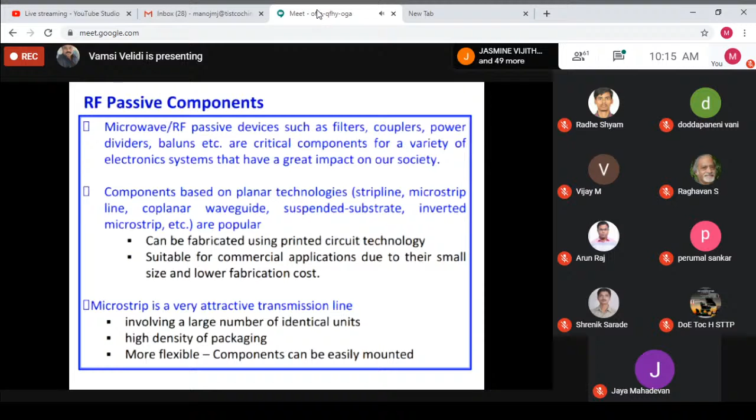But whatever transmission line theory we discuss, these can be readily converted into planar technology. And obviously we know the advantage of microstrip among all planar components. Microstrip is bit easier with high density packing, and we can include other chip components also. So the integration point of microstrip is relatively better than stripline, suspended stripline, and other technologies.

Coming to the filter, these are the most important components for any communication system, as a communication system consists of transmitter, receiver, and antenna. So almost all systems are used with the filter. I can say the filter is a discriminating component for a dense, high frequency electromagnetic spectrum, because the whole spectrum is fully used for different applications in different bands. So how to separate out the band so that a particular transmitter will receive only a particular frequency. So the filters are indispensable components, I can say.

Coming to particular transmitter and receiver, if it is a receiver, there are several places where filters are crucial. The first and foremost, right after the antenna, is the filter. Because though the antenna receives a particular narrow band signal, there is a lot of out-of-band noise also included in that. So the filter should suppress all the noise and pass only a particular frequency. This is called pre-selection in the receiver. This filter should be low loss with high rejection in the outer band, and should be narrow band as per the requirement of the receiver. This is a challenge for the designer, because high rejection and low loss together is a bit of a challenge.

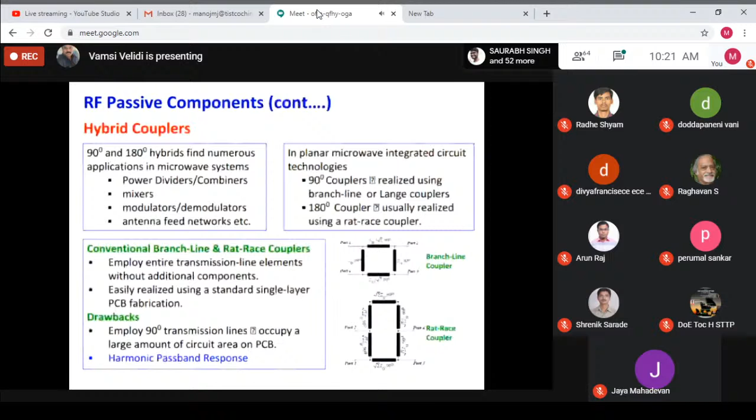A balun is also a component where differential components are much used, requiring 0 and 180 degree phase. For antenna applications like dipole and others, this balun is the first component. So to miniaturize artifacts and suppress harmonics, this balun can also be constructed using filtering concepts.

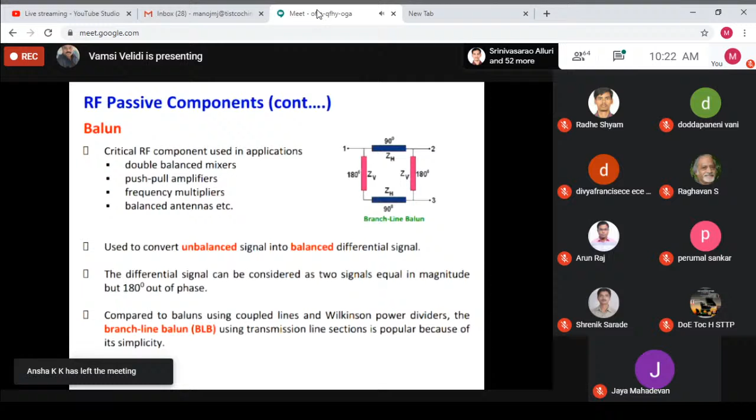So for design objectives, I'll explain the filters compared to the ideal response, conventional response, and the present performance response. If you get a clear understanding about these responses, then we'll concentrate on how to generate these responses using various methods. The first one is the band stop filter.

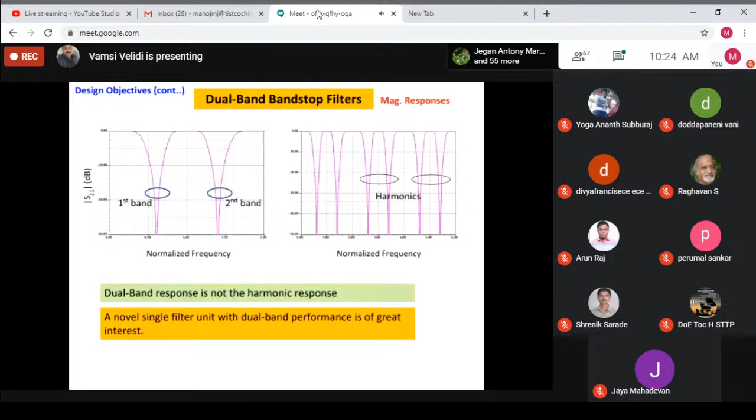And the low pass filter - in conventional methods we see a gradual roll-off from the pass band to stop band, and the stop band bit also extends somewhat. Now the present design goal is to increase the selectivity while being able to suppress as much as possible in the stop band. Up to now, present day research has achieved filters up to 10 times the cutoff frequency.

That is the low pass filter, available up to 10 times the cutoff frequency. So a band stop filter with a wide stop band can also be thought of as a low pass filter.

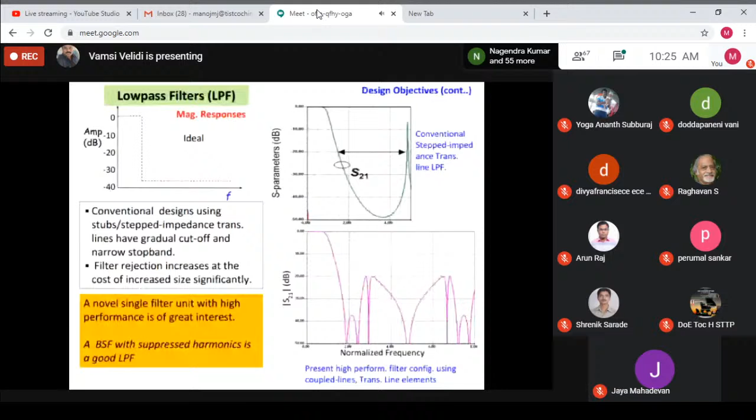Now coming to the band pass... Sorry to interrupt you, sir, the voice is breaking, not going smooth, it's breaking in between. Okay. Sir, it is a nice lecture. Okay, madam, maybe everybody is having some issue sometime. Please check.

Actually this might be because of some connectivity issues in the signal. Sometimes it is good at some points. Sir, will you please shift to the computer or laptop? Sorry to say, sir, I don't have a laptop right now, I'm in office actually. Okay sir, thank you. Actually this is the only way, sorry for everybody.

I think it gets clear after some time. Sir, now it is very clear, hello, can you try talking like this? Now it is very clear. But madam, after some time... Hello, okay madam, I'll be in this position now. Okay sir, hello, yes sir, I'm able to hear you, shall I proceed madam? Yes please proceed sir.

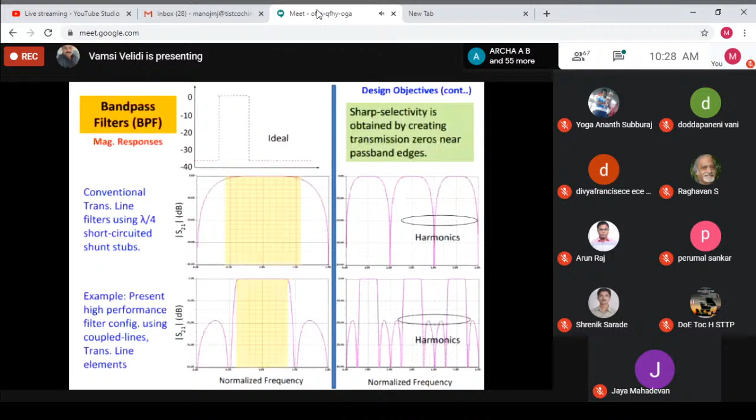Similarly, dual band pass filters have two pass bands. These are presently of great use for mobile bands like GSM - take for example 0.9 GHz and 1.8 GHz. Here, instead of using two filters for the two frequencies, a single filter working in both bands simultaneously is very important. So how to design these filters and what methods achieve this type of response - we are going to show.

These are important, sir. Yes ma'am. Mahadevan is telling ma'am it might be better if you could log off and log in again, it might improve the voice clarity. Sure ma'am, I'll do that. Okay, we'll wait sir. Sorry for that, no problem sir, fine fine.

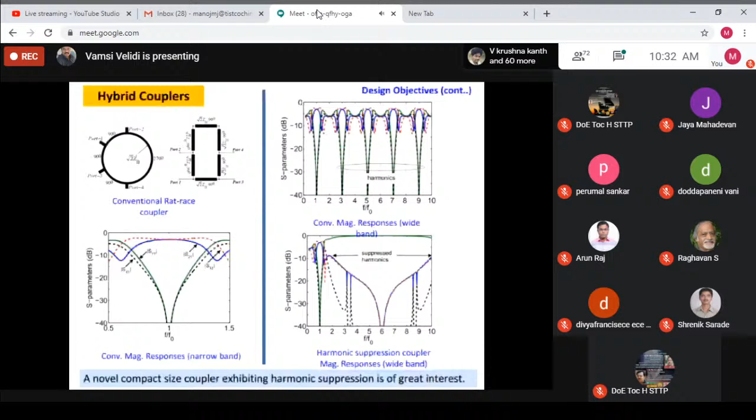Now the workflow for this component design, in advance, I am showing. So whatever may be the passive component specification you get, take the problem statement.

According to that, the main motivation, where we get more information, is the literature survey only. So we'll have a good literature survey, so that we can understand what methods can be easily applied, and select one. Then theoretical analysis - suppose any transmission line based model is taken, we can have the theoretical analysis.

Now for that we need to perform a simulation. If we have our own theoretical analysis for the S parameters, we can just write that small expression in MATLAB and get our own response. Or there are some commercially available EM simulators where the circuit simulation part is given, like Ansoft Designer or ADS. We can take ideal circuit components, transmission line elements, and simulate. So we can compare these, whether this is meeting our specifications or not.

Next, once a particular technology is selected, suppose microstrip, then convert all the parameters in terms of physical dimensions and construct the geometry. Then we need an EM simulator here - we'll implement the whole structure for the electromagnetic effect, to see the full wave analysis. So we can use any commercially available EM simulator.

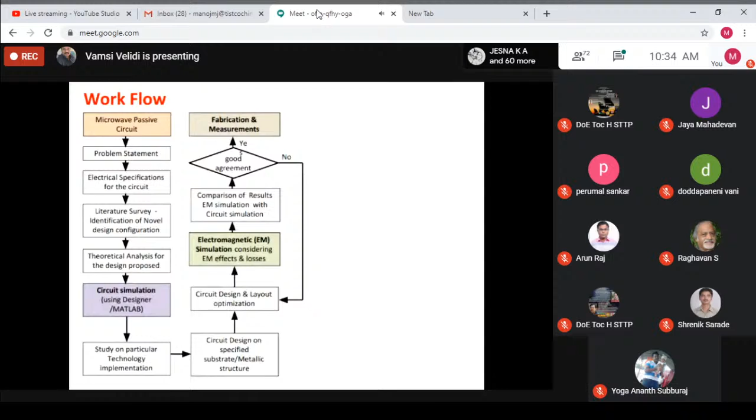Now let us start the transmission line theory based filters, which are the building blocks for constructing any filter, like band pass filter, band stop filter, low pass filter.

Let me give one slide presentation for the general theory of filter design. This is based on several textbook methods like image parameter method, constant-k, m-derived, composite filter, Butterworth, Chebyshev. The first basic procedure is to get a low pass prototype. There are some tables given for the ripple, rejection, bandwidth, everything, so we'll select the component values for the low pass prototype. After that, there are conversion methods that transform this into the required band pass or band stop filters. This is the traditional way of doing filters.

But now there are other methods also - this is just the introduction. Now we'll see the transmission line based design. For that, a small understanding about transmission line terminology is very much essential. I'm not covering everything here, just what are the major ones required specific to filter design.

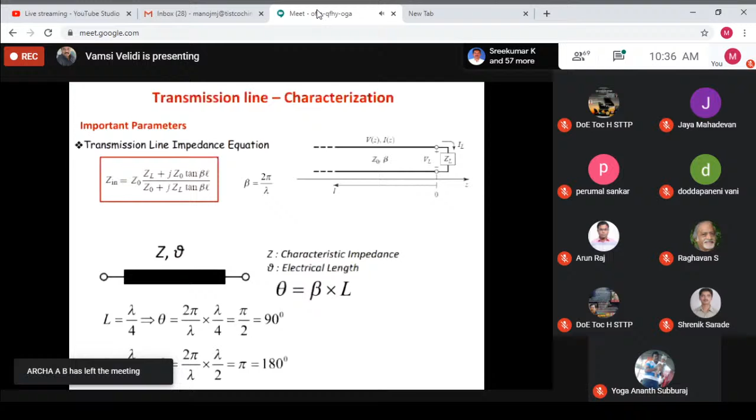Now I'll highlight those. For any transmission line, we'll have two parameters to define: impedance and its electrical length. There is a relation between electrical length and physical length in terms of the propagation constant - suppose we're talking in terms of lambda, the length is lambda by 2 or lambda by 4, we'll have a conversion here. If it's a quarter wavelength line, the corresponding electrical length becomes 90 degrees - a lambda by 4 line means 90 degree electrical length. Similarly, half wavelength means 180 degrees. And the input impedance expression for any transmission line having a load is shown at the top.

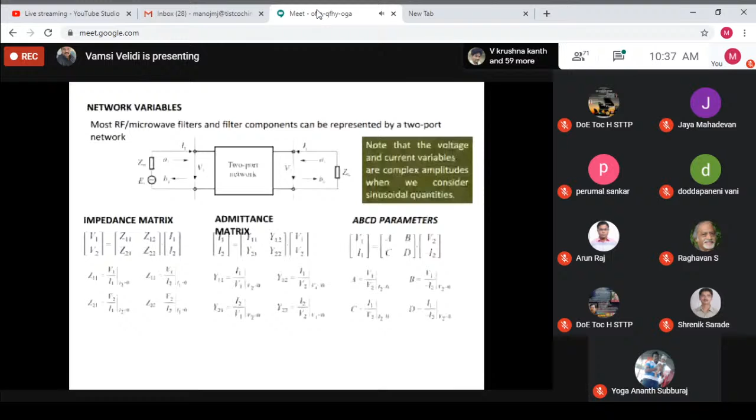Now there are some more prerequisites for understanding - the two-port network concept. This you can get from any Pozar or other textbook. There are some parameters to represent the network, or to derive the final parameters we're interested in, like S parameters. We'll have impedance parameters, admittance parameters, ABCD parameters, and finally the S parameters. We'll have this basic understanding from any graduation course, so take it for granted. Moving ahead - these are the S parameters, and the terminology is insertion loss, return loss for the filter, or if it's an antenna, its return loss.

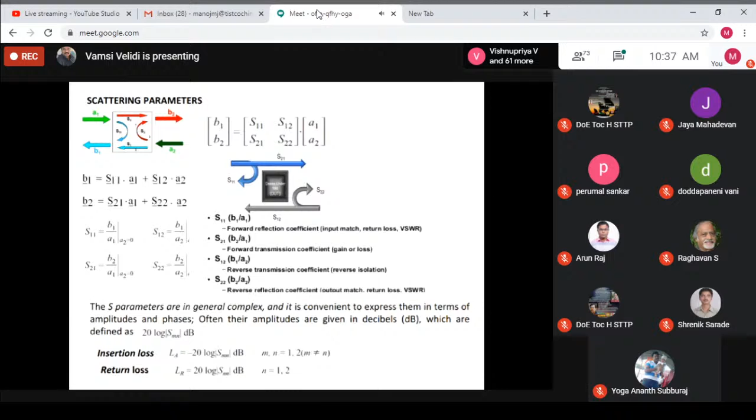After that, ABCD parameters for some cases are ready-made available in the textbook. Suppose if it is a series element, what are the ABCD parameters? If it is a shunt element, if it is a simple transmission line, the third one shown is the transmission line I showed before. These ABCD parameters are derived, and if any two-port network can be represented with pi configuration or T configuration, these will be helpful in your derivation. For that, I am showing what is available in Pozar.

After that, in the derivation process, you may also require some conversion from ABCD parameters to S parameters. Suppose in a circuit topology, if it is easy to use Y parameters, if two circuits are in parallel, you can get the overall Y parameters by adding the individual Y parameters. Once you get the overall Y parameters, you have to convert them finally into S parameters. Ultimately, the goal is to derive S parameters, which are easy to analyze and easy to measure using any vector network analyzer. For that, these are the conversion formulas available in Pozar.

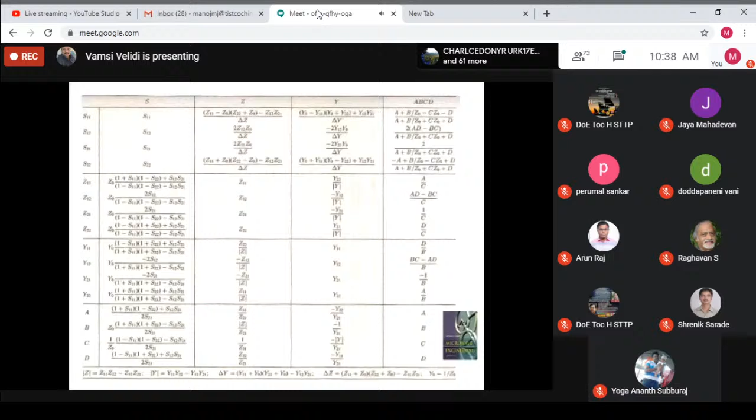Now coming to the basic transmission line elements. Here I have shown most of the popular elements. These are enough to construct any variety of filter. The first one is a simple transmission line with Z and theta. It is a normal transmission line.

Now coming vertically, I have shown the open-ended stub unit. That means the transmission line is connected such that the other end is simply left open. And if it is short circuited, and if two units are cascaded in double, triple, or four sections, that is called stepped impedance. Instead of a single impedance, we use two impedances with two different electrical lengths, or we can use the same electrical length.

There is another class of transmission lines called coupled lines, where two lines are closely spaced. This coupled line is one of the crucial elements in band pass filter design, and similarly in band stop, so that we can easily get the band pass response. There is a variety of coupled line configurations, like other two ends short circuited, one open, one short. There are 8 varieties also given in Pozar for reference. These will be used as construction elements for the filter. The combination of these designs will give very interesting filter characteristics.

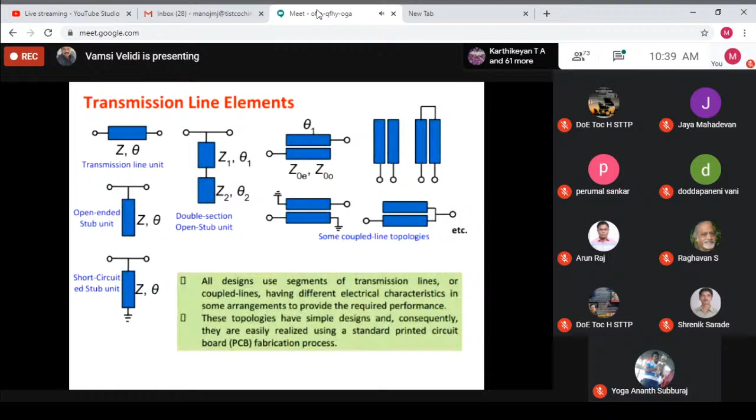Now, to understand the behavior of each and every element, I have shown some examples here. Starting from the first simple transmission line, no need to explain, it is an all-pass response. In terms of a filter, it will pass everything. So instead of that, I am starting with the open-ended line response.

Now, if you derive its input impedance, taking the input impedance expression for an open-ended line, since the load impedance ZL is equal to infinite, if you substitute that in the equation, we get Zin equal to minus j Z-not cot(beta L). Now, to get the S parameters directly, first we need to get the ABCD parameters for this. So I'm going back to the slide.

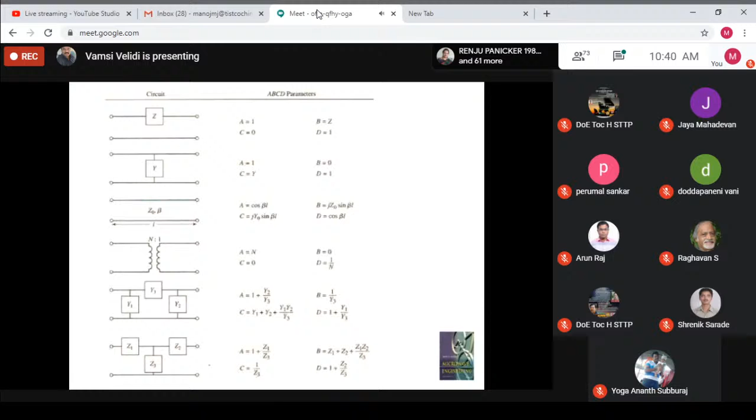Now here we can select the second one, because it is a shunt element. Why is it shown? Because the ABCD parameters are 1, 0, Y, 1. So in place of Y, we need to substitute this Zin, that means 1 by Zin becomes Y. If you substitute that in the ABCD parameters, then using the conversion formulas, you can write your code for S parameters. Now I am plotting the S21 response. This is how to generate our S parameters.

Once the S parameter response is shown, we can start understanding the behavior of the open circuited stub. Since if it is quarter wavelength, if you substitute beta L as pi by 2, 90 degrees as shown previously, then you will have a fundamental resonance at the operating frequency. The horizontal scale I have taken as 1 gigahertz, it can be normalized to any frequency. Now, if we see the behavior, since the electrical length is fixed, the operating frequency is fixed, but the bandwidth varies with the impedance. So if you see the profile, as the impedance decreases, that means if you convert into microstrip formula, as the impedance decreases, the line width increases in microstrip.

That way, I'm correlating here itself. So at the larger line width, it is more capacitive in nature, so finally its bandwidth gets increased.

Now, what happens if it is a half wavelength line? If you substitute beta L as 180 degrees, we are seeing two stop bands with respect to the center frequency, like 1 gigahertz. Whatever I am saying as electrical length, all are at 1 gigahertz only. That is our reference frequency.

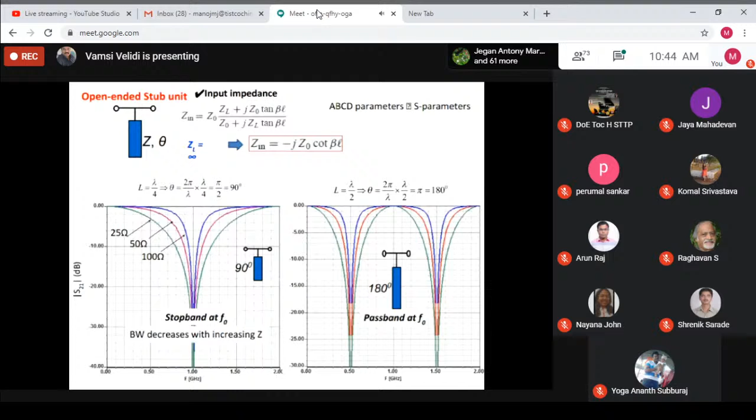Whereas if you split it into two with different impedances, so that theta 1 and theta 2 are shown here, if we derive the expression, we will get the Zin impedance like this. Then if you see the behavior, depending on the impedance selection for Z1 and Z2, we are getting controllability of the stop band compared to the single uniform impedance line.

So the observation is, if the impedance ratio is small, we are getting two stop bands, shown as the brown color graphs. Those are moving away from 1 gigahertz, which we always take as the reference. And if the impedance ratio Z2 by Z1 is higher, then we are getting the two stop bands like the black color one, and those are coming closer. If it is 3, 4, like that, it will come close to 1 gigahertz.

So like that, we can make use of this advantage of splitting the impedances into two. These will be used in band pass filter response with wider stop band, wider pass band, or dual band stops with controllable bandwidth, just by controlling the impedances.

So here, the basic understanding is, it is not a parametric based method. Suppose you take any other structure and just vary the width and length, seeing what happens - it is not like that. It is not random; everything is predicted here. We can have our predicted response, so that comfortably, wherever we want to exactly locate the stop band or pass band bandwidth, we can select based on the impedance selection simply.

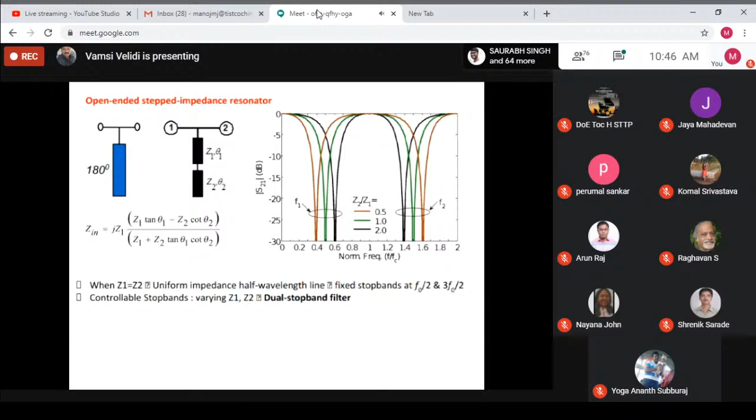And now this is the response for a coupled line. One example is shown. A coupled line, basically with two open ends, will give a pass band response. And depending on the ratio, because a coupled line can be defined using two impedances, called even mode impedance and odd mode impedance, whereas for a simple transmission line it is just a simple impedance. And here also, like electrical length, we should have even mode electrical length and odd mode electrical length.

We'll assume the phase velocities are equal in the two lines, so that we can assume the even mode and odd mode electrical length as the same single theta.

So for a quarter wavelength, this type of open-ended coupled line will give a pass band response. And as the impedance ratio increases, like ZOE to ZOO, that even mode odd mode impedance ratio, the pass band width increases. Accordingly, return loss also will show some variation.

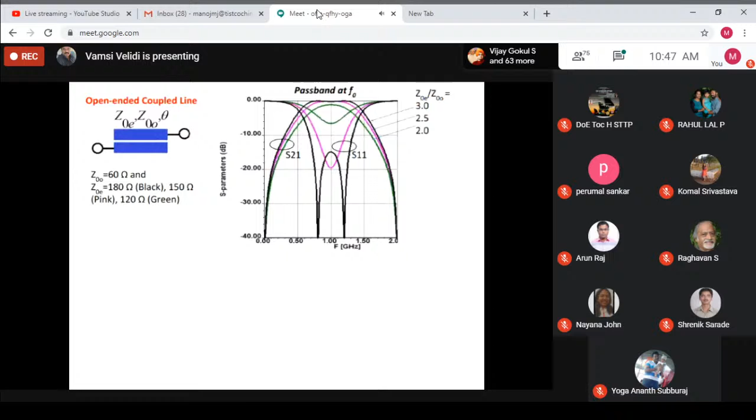In the Matthaei textbook, there are all variety of coupled lines and their ABCD parameters and Y parameters are nicely given, so anybody can take from there and start using them in derivation.

Now, using these elements, let us start with a band stop or low pass filter as an example. As I have shown, a single quarter wavelength open stub gives a stop band response. Now I'm comparing both the stepped impedance response to show the advantage.

The bottom figure shows the stepped impedance line response in black color. Based on the impedance ratio, if Z1 is equal to Z2, fixed responses at 0.5, 1.5, and greater or less than these, are shown.

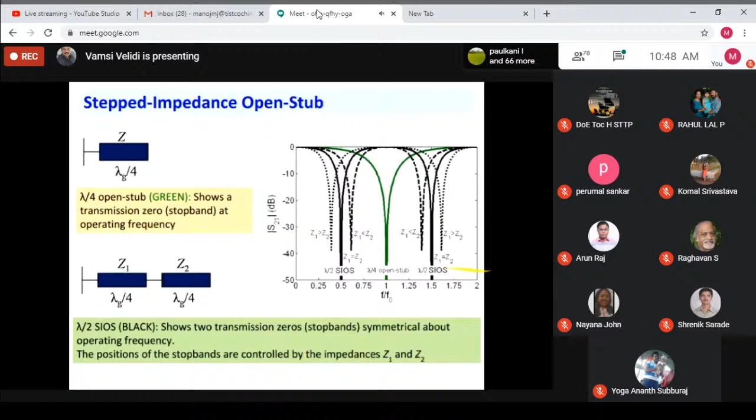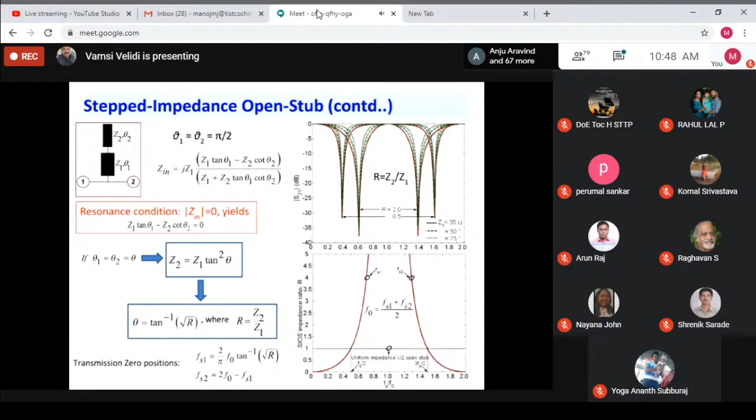Now let us use this in a dual band stop response. This is a simple behavior. To get the transmission zero position, we should make Zin equal to 0, then we'll get a condition in terms of theta. The position variation is shown here.

Now I'll show the design of the filter. This is the dual band stop filter, where one open-ended stub with stepped impedance is used. In addition, there are two series elements, Z3, theta 3, also shown.

Based on the method I explained, we can derive the S parameter. For any network, we can think of it as cascaded transmission line sections. Suppose Z3 theta 3 is cascaded to the open-ended line, and again cascaded with Z3 theta 3. So we can comfortably use the ABCD parameters to get the overall S parameters, just by multiplying individual ABCD parameters to get the overall ABCD parameters, then convert into S parameters.

After that, we get this expression. In the next diagram on the right, we have added the effect of the series transmission line on improving the bandwidth. As Z3 increases, the bandwidth also increases, meaning if the line becomes thinner in terms of microstrip physical dimension, we will have wider bandwidth.

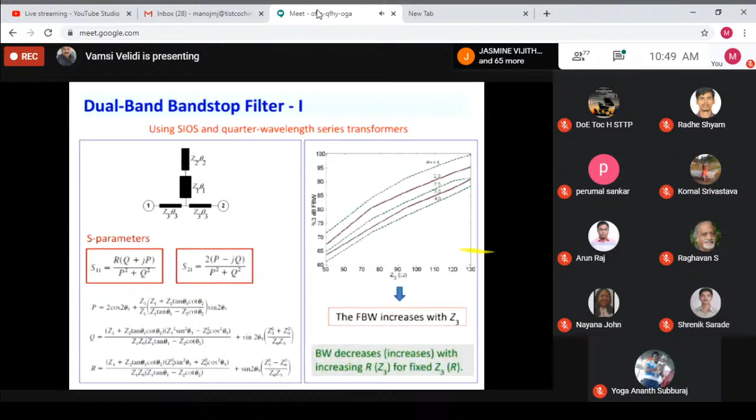This is the implemented filter as an example. After finalizing the impedances, suppose Z3 is equal to 95 ohms, Z1 is equal to 35 ohms, and Z2 is 70 ohms. These are the selected values to get responses at 1.5 and 3.4 as an example.

The same structure is implemented in microstrip, and for miniaturization we can bend the transmission lines also, and we should compensate for all this bending and whatever junctions are used. Accordingly, the EM simulation response and measured response are very well matched. This is an example designed for some specific frequencies.

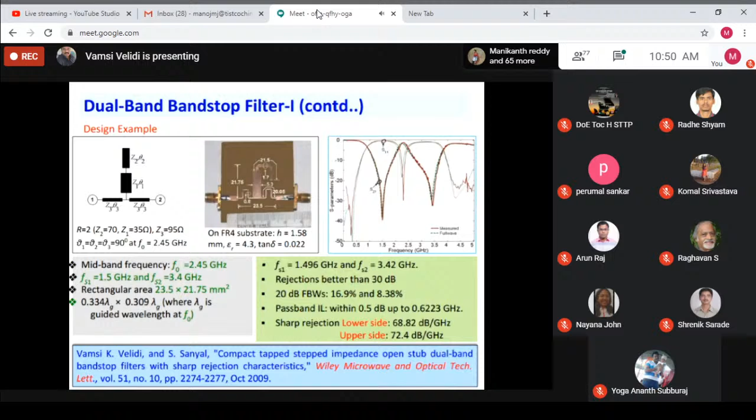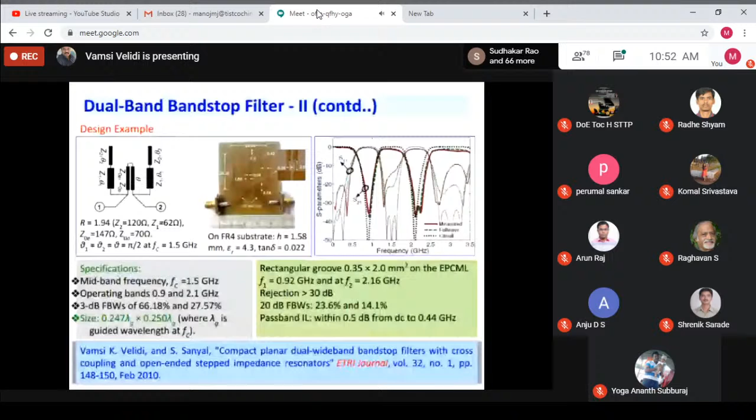If you see, that is not as expected in the theoretical simulation. The EM simulation itself shows the deviation followed by the measurement, if your design is properly simulated. However, if the rejection levels are well meeting, we need not bother about the transmission zero shape. So we can go ahead.

Next, so far I have shown dual band stop responses. Now we'll see how the ultra wideband band stop response is achieved.

In the very first slide I have shown a conventional filter having a narrow, simple stop band. If two transmission zeros are introduced, that stop band width increases drastically. At the same time, filter roll-off also becomes sharper.

So here, as a first one, I have shown the top one is conventional optimum band stop filter. It is termed optimum band stop filter because with 3 stubs we can comfortably have the widest response. That's why it is called an optimum band stop filter. Like that, n number of stubs we can use.

If we take the optimum band stop filter response, it is producing a single transmission zero like any other, but with sharp rejection. Now, if we incorporate the stepped impedance line in between, then as we know, the stepped impedance stub with impedance ratio, impedance selection, will have 2 more stop bands. That's why, in addition to the center stop band, we'll see 2 more transmission zeros, just lower side and higher side, which results in an ultra wideband band stop filter response.

Here, more than 120% stop band bandwidth is achieved. Now the bandwidth and roll-off, everything is controlled by just varying the impedances only. Everything we can predict here - the controllability of the 2 stop transmission zeros above and below the stop band. At the same time, the roll-off and the rejection depth also, everything we can control with the impedances.

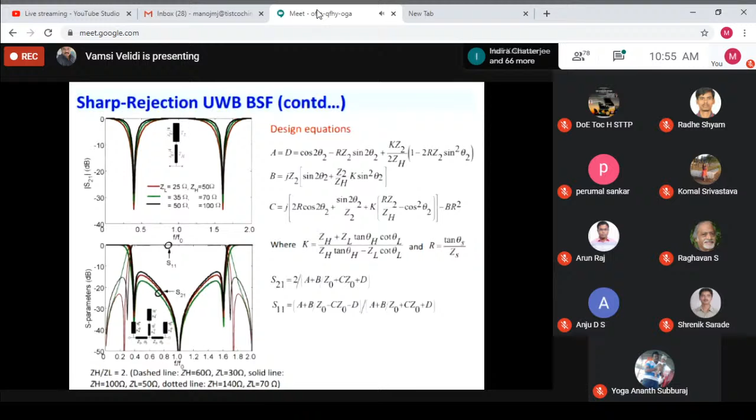So now the implementation on microstrip. The same circuit here, the higher impedance, the open stub - at the end it is using low impedance line, ZL, that will occupy a little wider width on microstrip. Instead of that, we can replace that ZL with a combination of 2 parallel lines, that is implemented here.

So a single low impedance line is replaced with a parallel combination of 2 high impedance lines for miniaturization purpose. And the geometry selection, we can have as compact as possible. That depends on the designer's choice.

Now, if you see all the 3 responses here on the right side, these are almost following the circuit simulation except the very out of band response. Like that, ultra wide stop band with roll-off, everything is almost achieved.

While in the out of band, because the geometry is made in such a way all lines became closer, there will be coupling effects also. That's why the return loss in the out of band is not as per the circuit simulation, but the trend is same. And the levels are since below 20 dB, it is optimized and stopped at that extent.

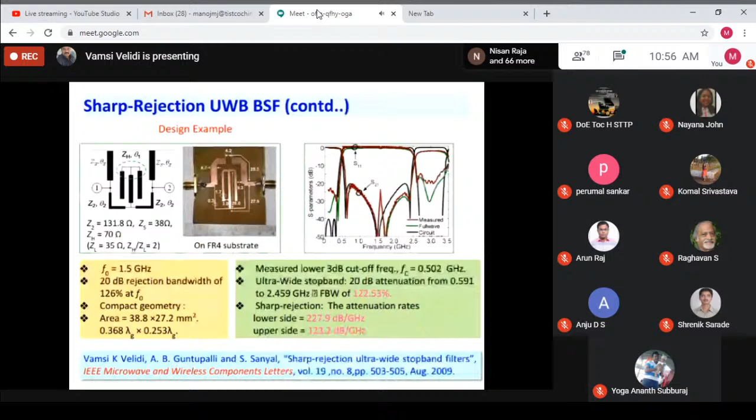So here, this is the ultra wideband, so far available in literature, 122% stop band bandwidth, and the sharp roll-offs are a major part of this one. So this same filter can also be thought of as a low-pass filter because the wide stop band is there. So it is ultra wideband band stop filter or a low-pass filter with wide stop.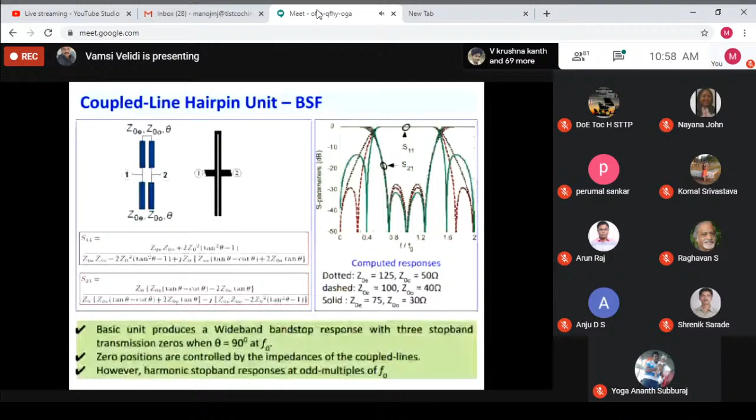Next, this filter, as I mentioned earlier about the harmonic responses, the same response will be repeated at odd harmonics. That is shown in this one. That means at 1 GHz, if we design the 3 transmission zero set, it will repeat at 3 GHz. In between, there will be a pass band.

Now, if you construct an open-ended stub and select the electrical length such a way that it will produce a transmission zero at 2 GHz, we'll see a continuous stop band starting from 1 GHz to 3 GHz. So with the simple addition of a stub at the input and output, and selecting its electrical length in such a way, we are drastically changing the behavior, converting the simple band stop filter into a low pass filter with wider stop band. That is the extension of that one.

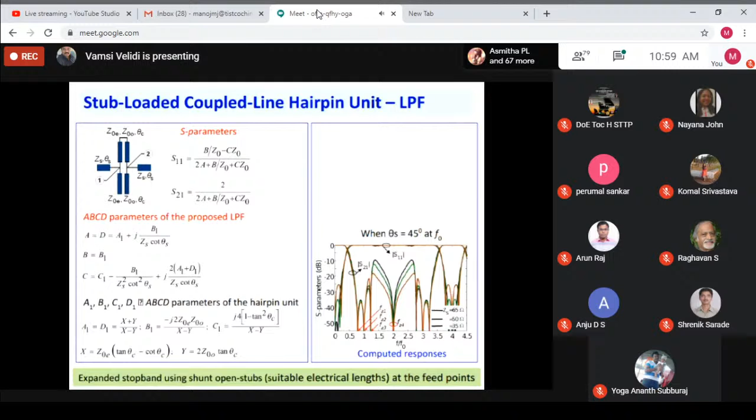So once we finalize the circuit part and can predict the design here itself, only then can we go for EM simulation. Here the final filter is implemented like this. The value is selected for a 20 dB stop band rejection: even mode impedance 128 ohm and 55.

At the same time, the designer has to keep in mind whether the impedances are realizable for practical implementation. Suppose a particular combination of even and odd mode impedances gives a 0.1 mm line, then we will not select that one because it's very difficult to realize practically. At the same time, whatever substrate we are using, we should consider whether these values are implementable there also.

So this is the response, where the circuit simulation response is shown as a dotted line, well below the 20 dB. Since the coupled line is used, and because the coupled line practical implementation is different from theoretical, we are getting the deviation. However, if it is below 20 dB, that is acceptable, whereas the filter roll-offs almost follow the circuit simulation.

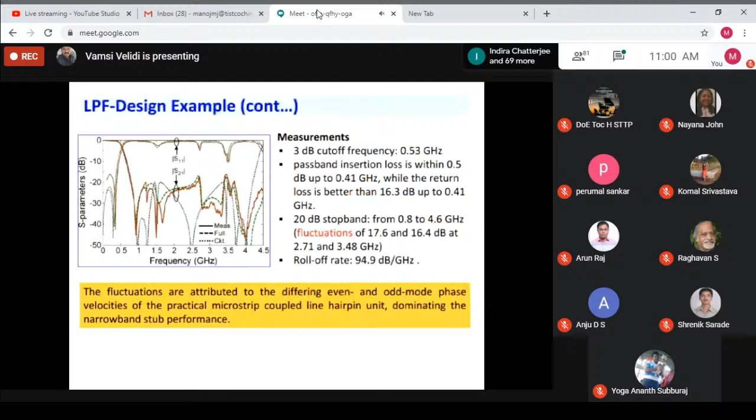One more example: using a stepped impedance hairpin unit compared to the simple microstrip coupled line hairpin unit. Here a combination of a transmission line and a coupled line is used. I'll move fast. While selecting the electrical length for the coupled line set, that's quarter wavelength electrical length, and for the lower transmission line, theta 2 is pi, that is 180 degrees. Then we will get a band stop with 3 transmission zeros.

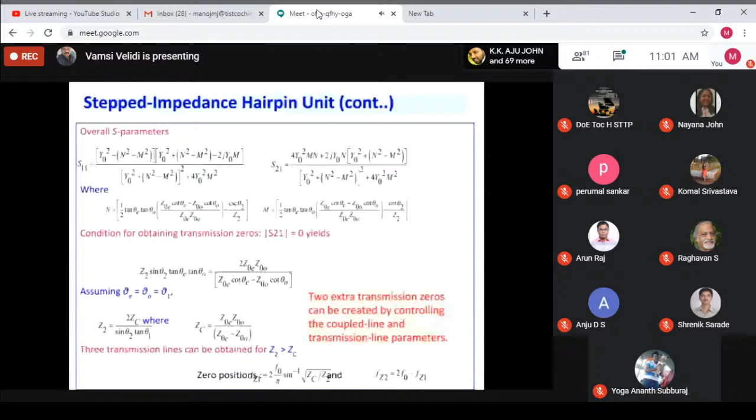So the same derivation we can have again, Y parameters for transmission line and coupled line. Just add those and convert into S parameters. We'll get the overall response, and finally this is the implementation. Compared to the previous one with entirely coupled line, here our measured response is close to it, because one transmission line is also used. So finally, the geometry selection is the art of the designer's choice - how nicely you can have the geometry within a small size.

Now extending this band stop filter into low pass. Earlier I showed this by connecting two stubs simply. Here one method is to design another low pass filter at the mid band. Suppose at 1 GHz if we design, the same set will repeat at 3 GHz. In between at 2 GHz, if we design a smallest low pass filter and cascade these two, we will get a wider stop band low pass filter with high rejection compared to the simple stub used.

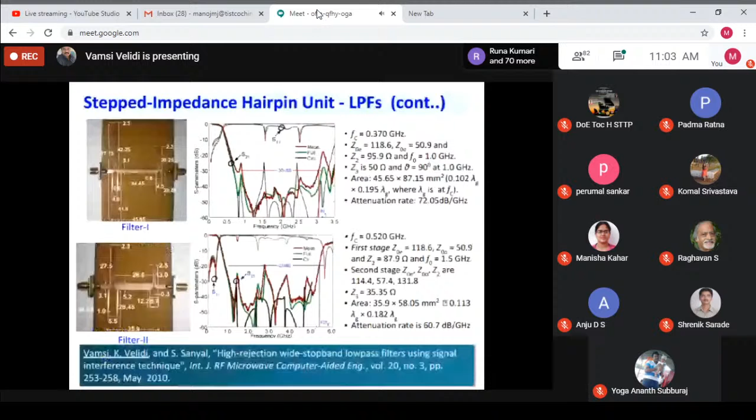Because the stub is a small element, we will not get high rejection. Instead, we can add one more low pass filter so that we get deeper rejection. So two examples are shown here. Two units are cascaded with a simple transmission line in between, and the impedance selection helps get the match, and the width value also you can control so that the overall level should be less than 30 dB or 20 dB with a wider stop band. These are just examples.

Now one more band stop filter entirely using coupled lines in this fashion. I need to mention that the whole filter size in terms of width is smaller than a 50 ohm line. Because the two coupled lines are connected in the form of H, the even mode and odd mode impedances are selected such that the entire width is smaller than a 50 ohm line. A 50 ohm line on microstrip FR4 substrate occupies 3 mm, so here the entire filter width is less than 3 mm.

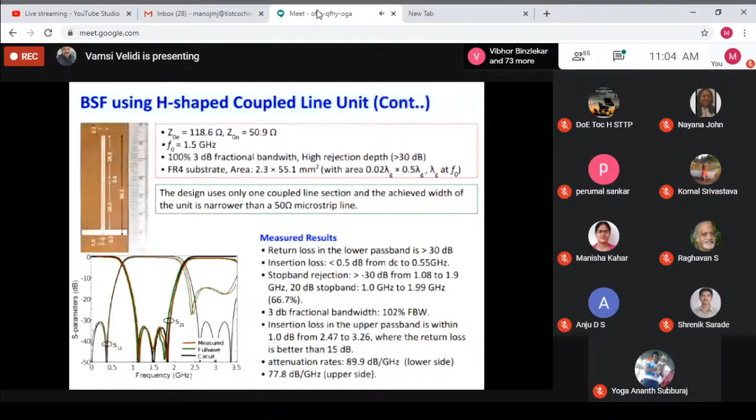So any filter can be thought of as a construction of transmission components, but here the entire filter is as good as a simple line, and it is also producing a very good response with 30 dB rejection and sharp roll off. These will be of high interest if we integrate with an antenna without using much circuit area and without complicated analysis. Simply by understanding the behavior, we can add this for antenna harmonic suppression purposes. I'll show that example also.

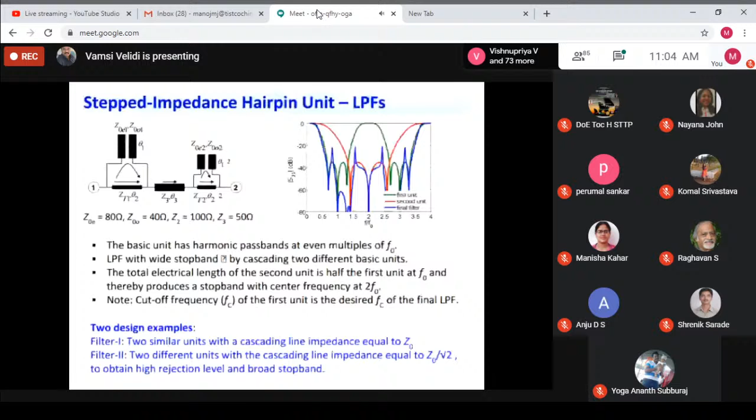Earlier I showed two filters cascaded using a transmission line in between; otherwise it is difficult to join these two. But here this configuration allows cascading a small low pass filter just at the other port, as shown in the circuit. The first top filter is designed at 1 GHz, and the same set repeats at 3 GHz. The smallest H is designed at 2 GHz, and we simply cascade these two without any transmission line. Then we get a wide stop band up to 3.5 GHz. This is implemented in microstrip form like this.

So far, some examples I have discussed based on coupled lines, transmission lines, and their topology arrangement. Now one more class is the signal interference concept, where multiple transmission line sections are connected in parallel so that a complete closed loop is used. We can have different electrical lengths for different lines so that the signal passes in multiple paths from input to output. Whenever constructive interference happens at the output, we see a pass band; whenever destructive interference happens, depending on electrical length and impedances, we see a stop band. This concept was published in IEEE MTT.

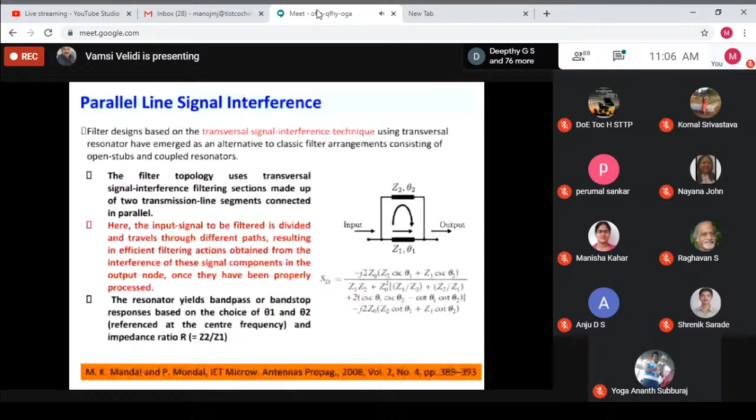Here a simple two transmission line connection in this loop form lets us derive the S parameter simply by adding the Y parameters of one transmission line with the Y parameters of the other with a different length, to get the S parameter. If theta 1 is 90 degrees and theta 2 is 270 degrees, we get a band stop response with two transmission zeros. If the impedances are the same, we have one stop band only. If the impedances are different, we again get two transmission zeros above and below, so the bandwidth gets slightly widened and sharp roll off can be achieved.

Similarly, the same band stop response will be achieved when theta 1 is 180 degrees and 360 degrees, which is not shown here, where you get two more transmission zeros with a single middle transmission, giving a total of three transmission zeros. Here a band stop example is shown.

Similarly, in literature, the same signal interference concept exists for band pass filters and dual band pass filters also. In the next example, the signal interference concept uses a coupled line. Compared to the earlier design, this has a wider stop band response. Here, if Z1 theta 1 is replaced with a coupled line with open ends, we see a wider stop band response with multiple transmission zeros, depending on parameters like Z0.

So here, there is a possibility to get 3, 4, or 2 transmission zeros. Obviously, if it is a 3 transmission zero unit, the filter ripple remains constant. If it is a 4 transmission zero filter, we'll need some more adjustment to keep that ripple level same, so that is little difficult.

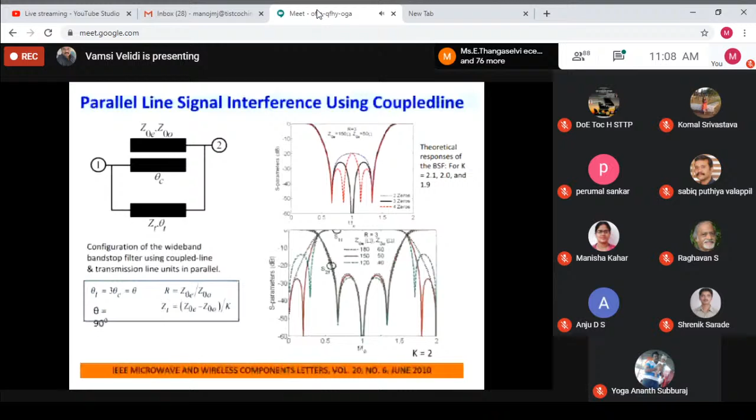So these are all based on selection of impedances only. After deriving and checking the controllability, we concluded when the impedance ratio K is 2, the stub impedance selection will comfortably give 3 transmission zeros. So this is the derivation, and this is the implementation.

So the couple line with the transmission line impedance is little low, that's why a wider line is shown at the bottom.

Now so far we have seen band stop and low pass filter. Now a few examples for band pass will be shown. So here a cascaded version of n number of coupled lines is shown. This is the first textbook design. If a single unit is used, we will see a gradual pass band to stop band transition, and as the number of sections increases, the filter roll-off becomes sharp. At the same time, theoretically it is okay.

Practically, we will see a little higher insertion loss. But instead of having a general opinion that cascading filters just gives high loss, we can also study the behavior in terms of return loss, not only insertion loss. Sometimes return loss is wide enough so that the entire pass band has very good matching.

So these can be used for antenna harmonic suppression purpose also, because if the antenna fundamental frequency is passed by this filter, the out-of-band antenna response also follows the filter response, that means in terms of gain. So out of band we can suppress the gain, that advantage we can take with this type of filter.

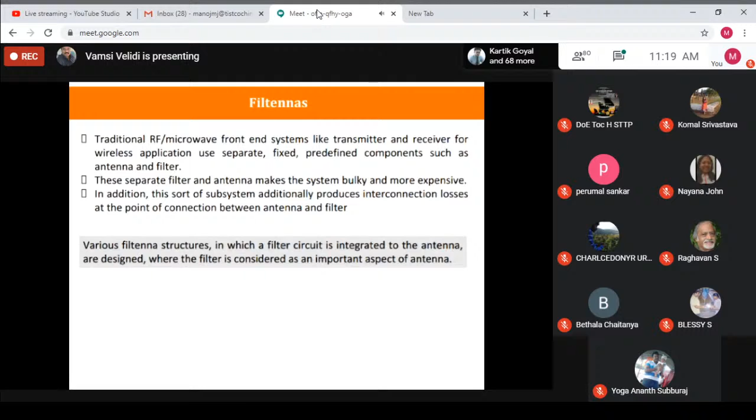So for two such applications, I'm showing filters here. Usually these would be connected with a cable, but we are using them as part of the antenna.

First, harmonic suppression of harmonic radiations in a simple microstrip patch antenna. There is no much new design in the patch antenna itself - we can apply the same concept to advanced antennas with different shapes and other antenna types. One traditional microstrip patch is taken, and we'll use the filtering concept to reduce multiple harmonic radiation.

What is to be highlighted is that usually there are methods available in terms of multi-layer and defected ground plane structures, where the bottom ground plane of the antenna is etched in such a way that out-of-band radiation - meaning higher order harmonics - will be suppressed. But all these designs are bit tedious.

These designs all depend on EM simulators only. And finally, the placement of the antenna becomes an issue, because if we have some structure in the bottom, we cannot place the antenna on a plane or boom directly. We should leave some air space, volume below the antenna, so that the bottom structure also performs well electromagnetically. So these are all the complications if we use defected ground structures or metamaterial based structures, where other designs are also available in the ground plane.

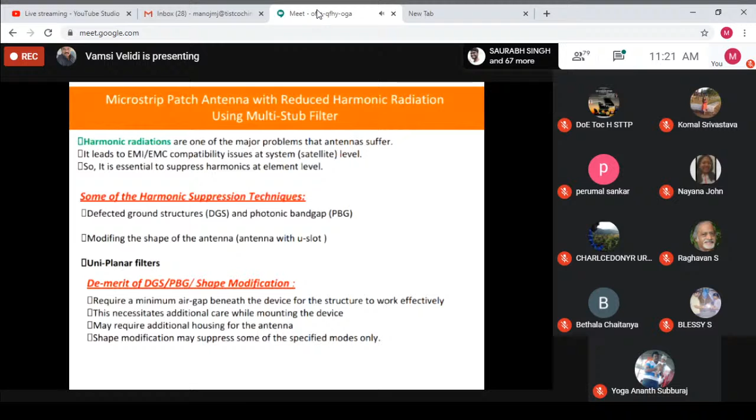Instead of that, if a uniplanar design is used comfortably in the same antenna plane, if you are able to design a filter so that it does not disturb the antenna much, but improves characteristics like suppressing the out-of-band response, these are of great importance.

For this purpose, a simple inset-fed antenna is designed at 2.4 gigahertz. If we see the out-of-band responses, the first two higher order modes are shown at 4.5 and 5.8 gigahertz. To suppress these harmonics, an optimum bandstop filter is used - earlier in my slides I have shown the bandstop filter design. So a simple 3-stub unit is taken, with the main idea being to suppress the out-of-band harmonics only.

That means the low pass filter response should have a passband which covers the antenna's fundamental frequency, and it should have a stop band as wide as possible. For this, since the 3-stub unit technically - after deriving, we find that the middle stub impedance is low, which will occupy a little larger width of microstrip.

Instead of using the low impedance line, we can replace all low impedance lines with their parallel combination of two impedances - just double the impedance, that's all. So the overall area looks very small using a thinner line, without degradation of much performance. From the circuit point of view, the response of these two remains the same, but in EM simulation we have to check that it has minimal effect compared to the reference design.

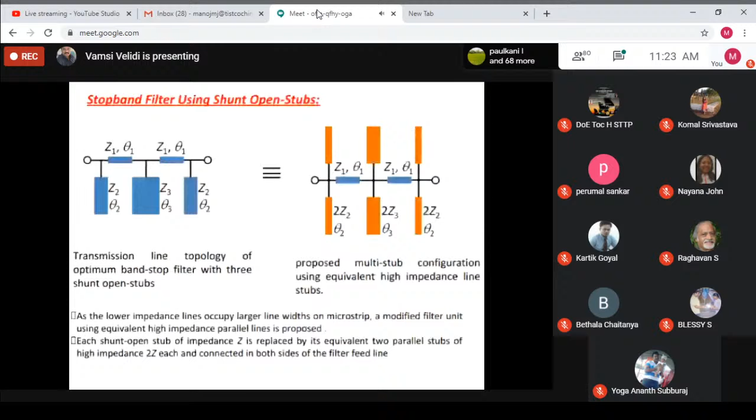So this is the implementation in microstrip. The impedance values are selected such that the horizontal line impedance is 120 ohms, and the vertical stub - the middle one - has low impedance, meaning a parallel combination of 60 ohms, so ideally Z3 is 30 ohms only, which is replaced with two 60 ohm lines. Similarly, end stubs have some 80 ohm and 50-plus ohm values, which is why it's replaced with 116 ohm.

The response of this passes the 2.4 gigahertz band, and the return loss was also very good at that 2.4 gigahertz. The out-of-band response is shown for the low pass filter. Now this is integrated at the feed line of the antenna. Where to integrate the filter is a bit tricky thing, so after a few EM simulations - because antenna cannot be implemented in circuit simulation - we determine the placement.

What is observed is from the antenna edge, after a quarter wavelength line, if we add the filter, there is a minimal effect of the filter on the antenna fundamental return loss. Otherwise, if the filter becomes close to the antenna, the antenna parameters also get disturbed. That's why after the quarter wavelength line on this substrate, it is around 16.8 mm. The filter is straightforward cascaded on the feed line, so the bottom plane remains ground only; we have nothing to do with that. We simply add the filter at the feed line.

Compared to the antenna's out of band responses at 4.5 and 6 gigahertz, since these are suppressed by the low pass filter out of band response, we'll see a clean suppression of these first two higher order modes. So this is just an example.

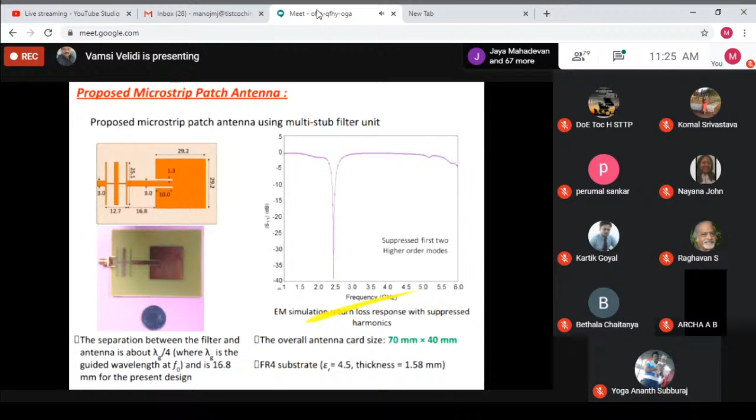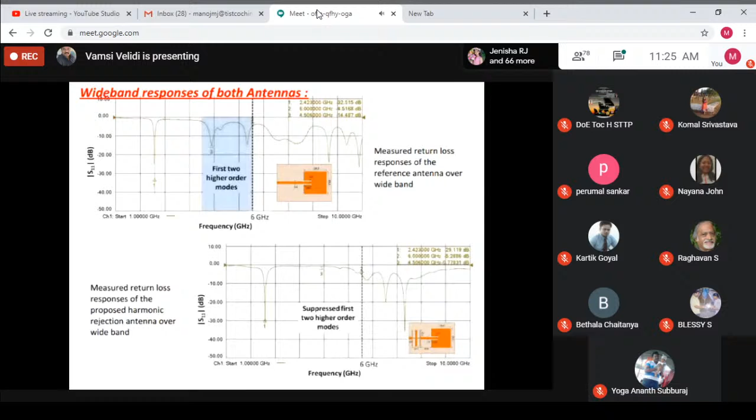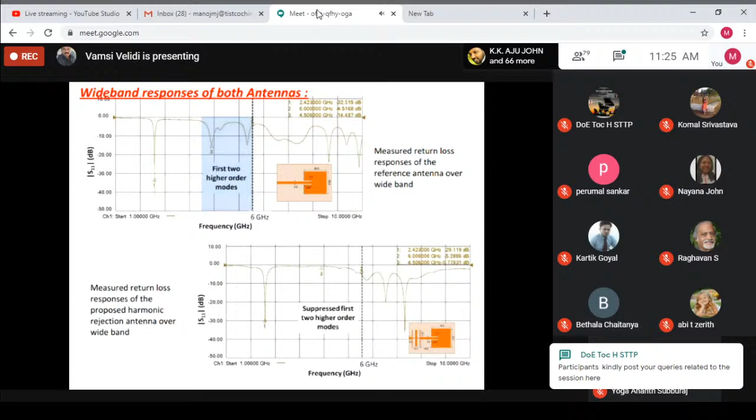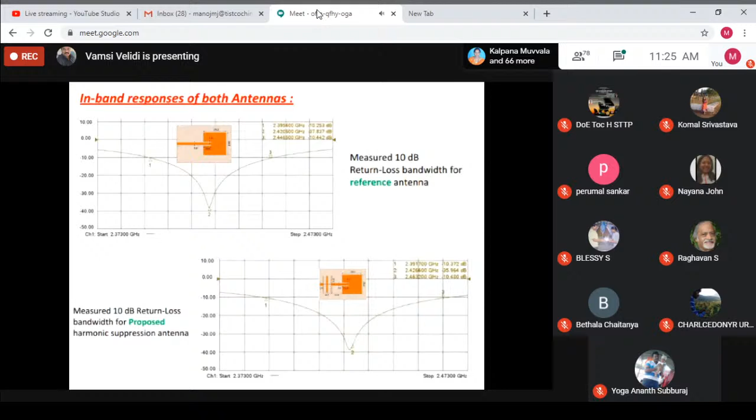This is the measured response showing the reference antenna and the filter now integrated. The first two higher order modes are suppressed; after that, other modes remain the same, almost repeating. Whereas the fundamental resonance frequency remains unaffected and is as good as the reference antenna. If you see the narrow band response, this is good with a small minor frequency shift of around a few megahertz only, whereas the 10 dB return loss bandwidth remains the same.

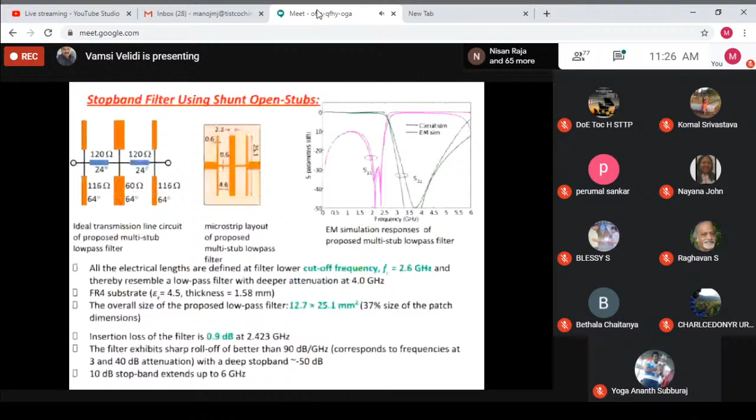If we compare the patterns also, one point to be mentioned is in terms of gain of the antenna. Suppose the reference antenna gain is 4.5 dB here. Since the low pass filter has around 0.9 dB loss in terms of insertion loss, the filter loss straightforwardly contributes to the gain only, meaning the gain of the antenna will be reduced by that amount of filter loss. So if that gain is acceptable, the designer has to select such a way that the antenna gain should be made, or within that margin we have to design the filter loss. Otherwise, we'll get the advantage in both out of band suppression, where all fundamental parameters remain unaffected except the gain. So this is one example for harmonic suppression.

The other case is to have gain reduction at an unwanted frequency. Here I cannot show the application pictorially, but I'll explain. For example, take the satellite Chandrayaan application: there is a lander and a rover. The lander will land on the moon or any other planet. The frequencies for the rover are selected such that they are close by, suppose 200 megahertz apart; if one is at 2 gigahertz, the other is at 2.2 gigahertz. So one system should not be affected by the other since these two are close by. That means if one transmitter is closely spaced to the receiver at the other frequency, that signal should not be picked up by this one.

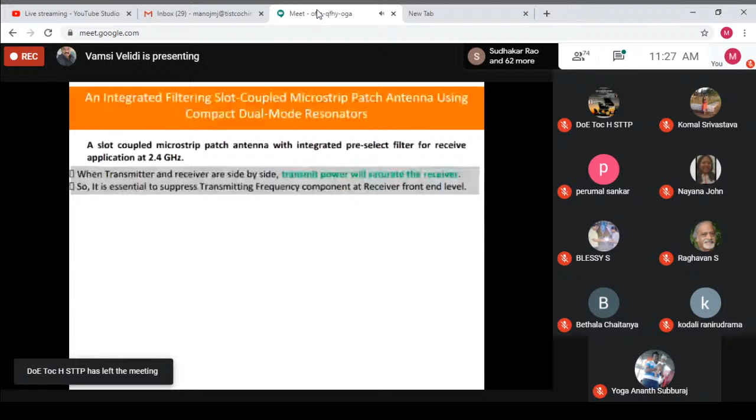For that purpose, we should have antenna gain considerations. If the antenna is designed at 2 GHz, if you practically measure it, you will see a considerable amount of gain at the other frequency, 200 megahertz away, if you see the frequency versus gain plot. So the idea is, if we design a very good band pass filter which has a very good passband at the required frequency and very good suppression at the other frequency, and integrate that filter with the antenna, then the antenna gain also follows the same pattern. That is the biggest advantage achieved.

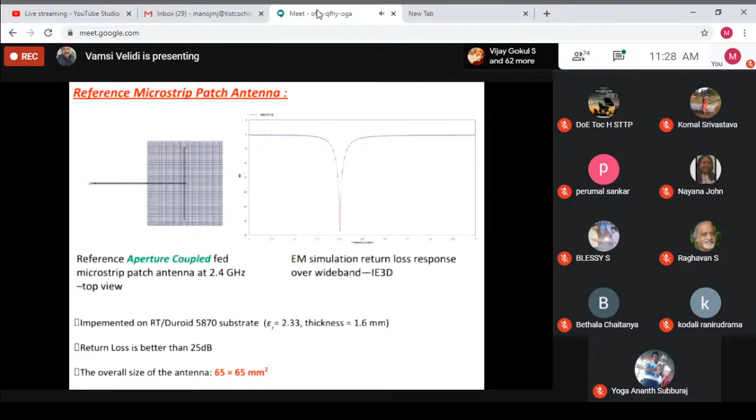This will straightforwardly add to the gain of the antenna at the fundamental frequency, whereas the gain at the out of band reduces and follows this filter response. So that is observed here.

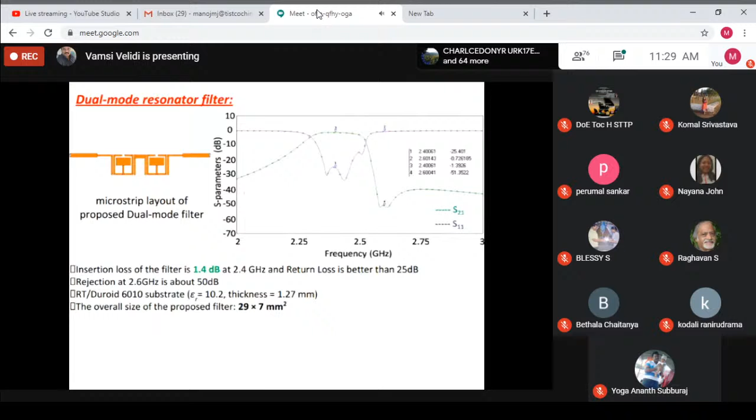Now the simulation, the EM simulation response of individual antenna and the filter cascade. As I mentioned, the filter is cascaded at quarter wavelength away from the antenna edge. Since the filter return loss is below 25 dB in this fashion, we'll see the overall return loss range where the antenna fundamental resonance remains almost the same, with the same bandwidth and all.

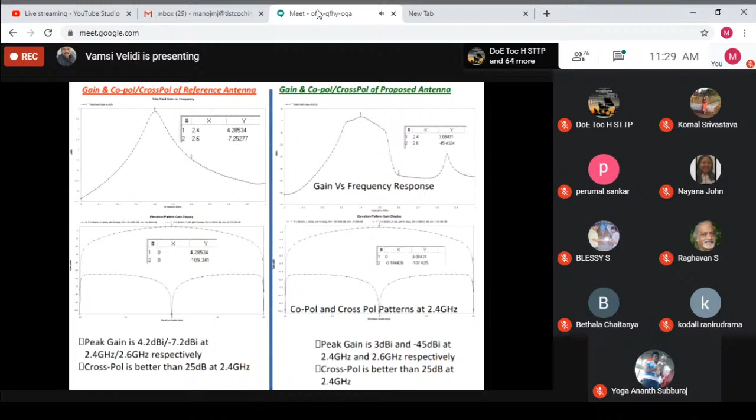Now this is the plot showing copole and crosspole for the reference antenna and the proposed antenna. The gain of the antenna at fundamental frequency is 4.2 dB. At other frequencies, minus 7 dB is observed for the slot coupled patch antenna. After integrating the filter, it is suppressed by around 45 dB and the gain is reduced to 3 dB, meaning 1.2 dB of filter loss is added. But the out-of-band gain is drastically reduced, whereas the copole crosspole pattern remains the same.

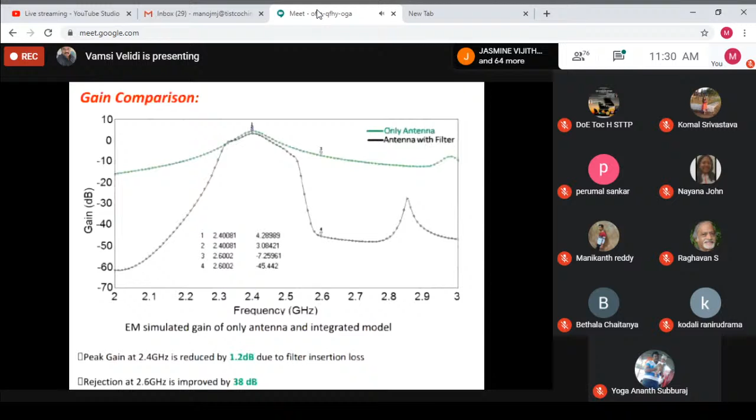So this is just a one-to-one comparison of only the reference antenna and antenna with filter. This is the gain plot comparing the single antenna and antenna with filter. The gain pattern is followed by the band pass filter. So in this way we can add some filters for antenna. It should be a part of the antenna so that we gain some advantage.

So these are the antenna applications, just two I'm showing quickly where the transmission line filters are used. Now I'll go back to the filter. This filter is used for antenna cascading purpose there.

So here I'll just explain this. I'll come to front end application. So the diplexer I'm going to highlight here - high rejection microstrip diplexer for RF front end. So just a quick introduction for the diplexer.

The diplexer is basically a combination of two filters, where the transmitter and receiver are connected, so that a common antenna is shared by the transmitter and receiver. Since the antenna is wideband, the receiver should not be saturated by the high powers of the transmitter. That means there should be very good isolation between the transmitter and receiver. What does that job is this diplexer.

The transmit and receive filters are designed to have low loss and high rejection, so that the transmit filter will have very high rejection at the receiver frequencies. Usually, depending on the application, we select the technology. Most satellite applications require waveguide filters only to meet the high rejection.

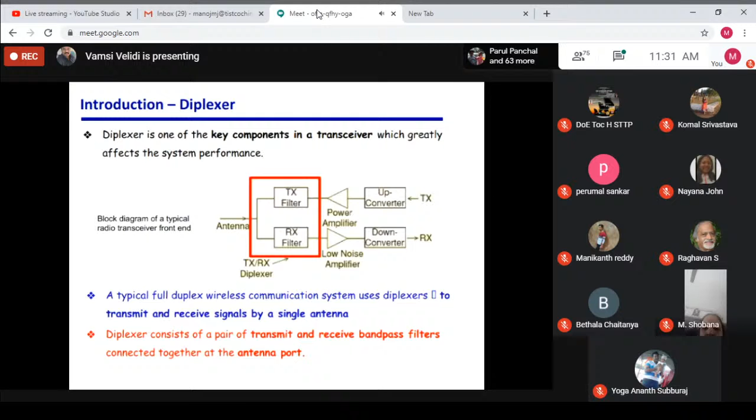And wherever possible, if the rejections are not so stringent, we can go with microstrip designs also. So for this, again I'm coming back to the filters - what type of filter is suitable for this? If it is a planar filter version, conventional filters will not have high rejection with smaller sections, and at the same time they will have larger losses.

Then here I'll introduce some asymmetric frequency response filters. So for that, just a diplexer basic response I'm showing - it is a 3-port network. Since S21 and S31 are the filter responses, S23 becomes the isolation, and S11 will become the return loss, obviously.

Here we should not get confused with a duplexer - there is a terminology difference between diplexer and duplexer. The fundamental difference is that a diplexer will have two different frequencies, whereas in duplexing operation we'll have the same frequency only. In radar applications, transmitter and receiver have the same frequency - when it is transmitting, the receiver will be shut off. So all the selection will be done by using a switch, which provides very good isolation. That means in receiving mode, the transmitter will be isolated.

But here in a diplexer, two different frequencies - the transmit frequency and receive frequency - will be different. So that one should have higher rejection at the other frequency. That is the challenge in the filter, with low loss. Now for this, a new class of filters, called dual mode open loop resonators, is used.

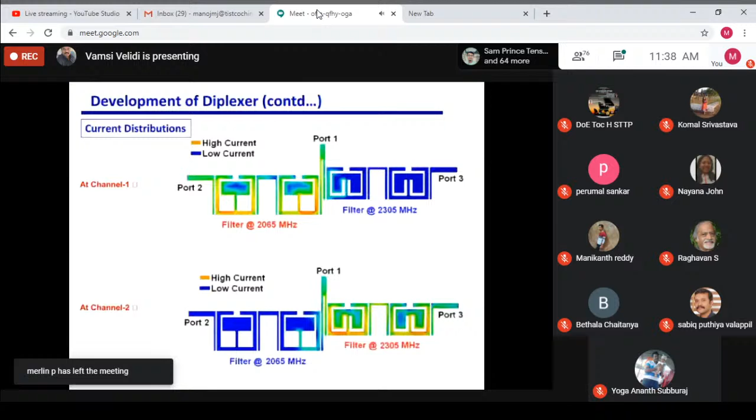We have to select the T arms such a way that one filter's response should not be affected by the other. Here, if you see the current distribution at the lower frequency side, the lower filter, the first passband is not disturbed - it is having maximum current distribution, whereas at the other frequency it is that one.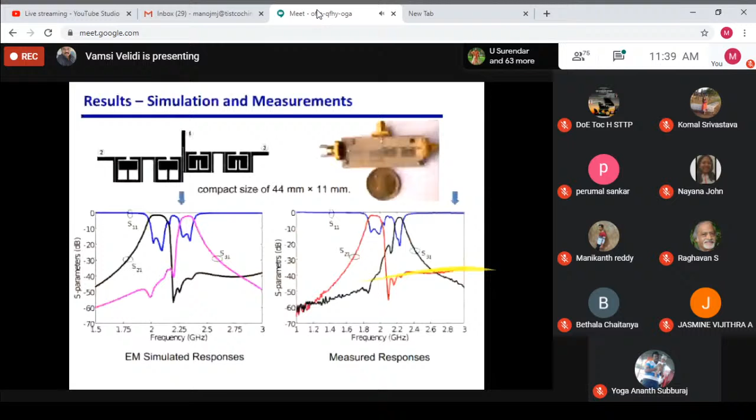This is just an example. These are the dual mode filters, a new class of filters we can use in the front end for isolating the transmitter and receiver. Now the antenna applications and diplexer applications we have completed.

Now I'll show how the filtering concepts can be applied to improve and miniaturize circuit components like branch line, rat race hybrids, or baluns. So here just a rat race coupler is taken as an example.

A fundamental frequency response and its out-of-band response are shown here. Now, since that basic design is constructed using 6 quarter-wavelength transmission lines, though we see the ring form in the textbook, it is a combination of 6 transmission lines connected between the ports where the impedances are root 2 Z0, that means 70.7 ohm, and all are quarter-wavelength lines at the fundamental frequency.

Now, if each transmission line is replaced by its equivalent bandstop or low pass filter unit, like in the antenna, how we use that low pass filter to suppress the out-of-band responses, similar concept. So a single stub unit, 2 stub unit, 3 stub unit, whatever, here we are going to replace, that means an equivalent form.

There in the antenna design, we just used that low pass filter to pass the fundamental frequency of the antenna, that's all. But here, since this rat race coupler has a unique impedance, the filter we are going to replace should also have the same impedance. That means, as I mentioned, we have to see the equivalence.

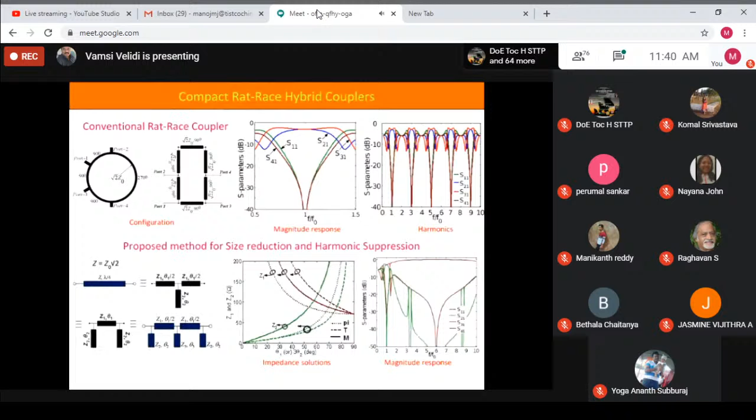So for this purpose, suppose the T junction is selected, we should derive the equivalence between these two using the ABCD parameters. Usually the ABCD parameters of the conventional transmission line are known, so that should be equivalent to the T-shaped line.

That means suppose the T-shaped line is the cascaded version of Z1, Z2, and Z1. You multiply the overall ABCD, then derive the expression in terms of the unknown parameters, what Z1 will be to get an equivalent of 70.7 ohm.

So here one graph is shown. After deriving the expression, we'll have the variation of the impedances with respect to the electrical length. What is observed is a quarter-wavelength line can be comfortably replaced with a smaller line, 45-degree line also, with 3 stubs or 2 stubs like this.

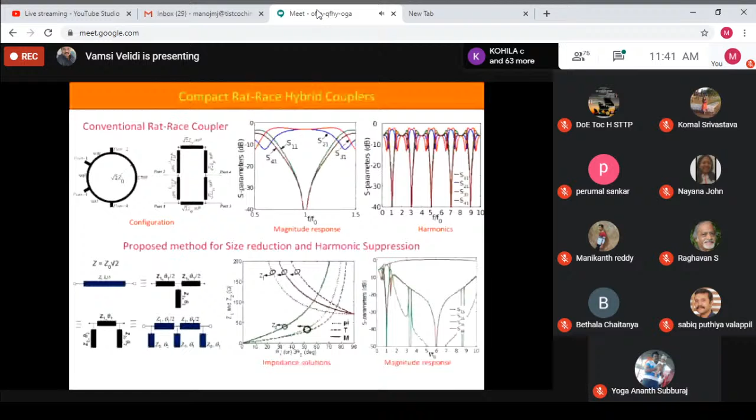So one example is shown here. The first, top line is the transmission line, that quarter-wavelength line. Now it is replaced with a 60-degree line. That means quarter-wavelength becomes 90-degree becomes 60-degree.

Similarly, the stub electrical length can be selected so that it directly contributes to the harmonic suppression, the out-of-band harmonics, because that is what gives the wider stopband, and we select depending on the stub impedance selection. Here it is targeted for 10th harmonic suppression.

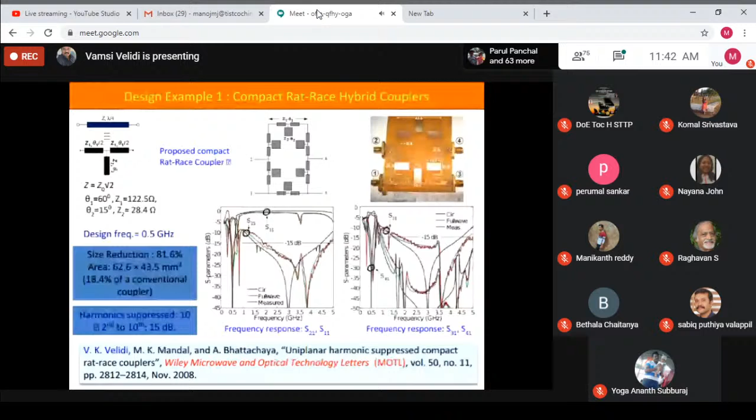All transmission lines are replaced with T units, 6 T units are used to construct the rat race coupler. Wherever possible, we can apply meandering for miniaturization so that the rat race fundamental frequency remains the same. So here, after miniaturization, the size is reduced by more than 80%, with the advantage of out-of-band suppression.

Now, suppose we replace the entire rat race coupler using a 3-stub unit. Here, compared to the T-shaped unit like the single-stub unit, the overall transmission line length, theta 1 by 2, theta 1 by 2 is shown. Theta 1 by 2 is selected as 22.5 degrees, that means overall theta 1 becomes 45 degrees, so the quarter wavelength becomes even lambda by 8.

That means half of the line, the entire unit is even much smaller than the transmission line. If such a unit is incorporated in the rat race coupler design, the overall rat race coupler shrinks to only 25% of the conventional design.

So these are the measured responses where the fundamental frequency, though there is a deviation, the 15 dB return loss bandwidth or 20 dB return loss bandwidth, you can have that as a difference that we should meet. So the huge advantage is out-of-band suppression is achieved.

So in this way, earlier I showed the signal interference technique, which produces a band stop response. The same concept can be applied to the branch line coupler or rat race coupler.

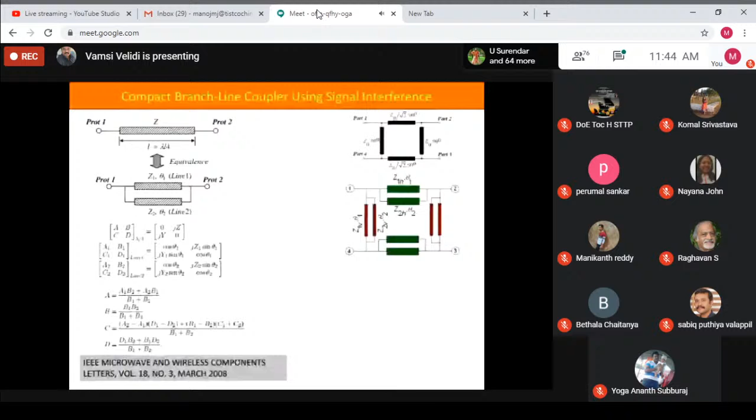Now, replace all the transmission lines with the equivalent signal interference line. Because this is a branch line coupler compared to the rat race coupler, here two impedances are involved. The horizontal line is 35 ohms, the vertical line is 50 ohms. Accordingly, we have to replace this with signal interference lines, two sets of lines. This is not to be confused with a coupled line, these are just two transmission lines, that's all.

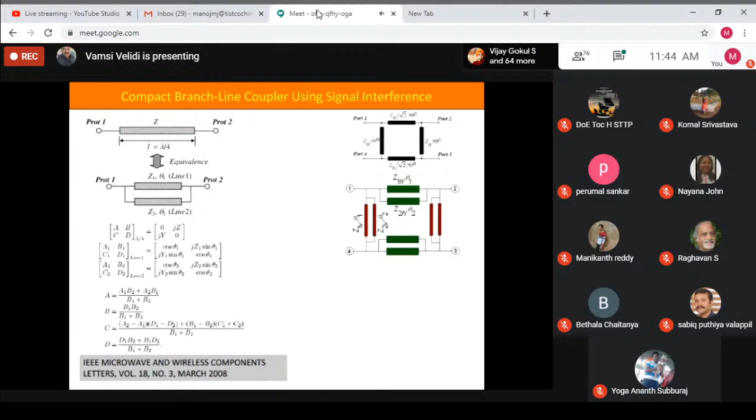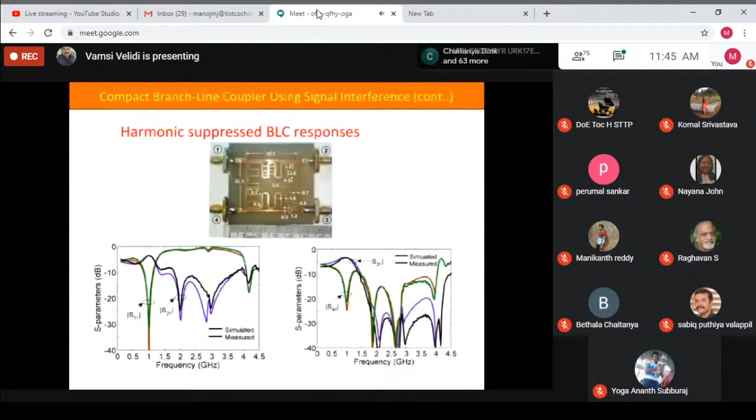Now this is the implemented branch line coupler with the signal interference line. The geometry is made such that there is minimal coupling, though the lines are closely spaced, so with help of EM simulation you can design and miniaturize to accommodate it inside the ring, so the outer space need not be used, and the overall area is confined within the branch line dimension. This is one application of the signal interference concept to the branch line coupler.

Now I have covered the filters and their application to hybrid coupler, diplexer, and antenna. With this, I will conclude.

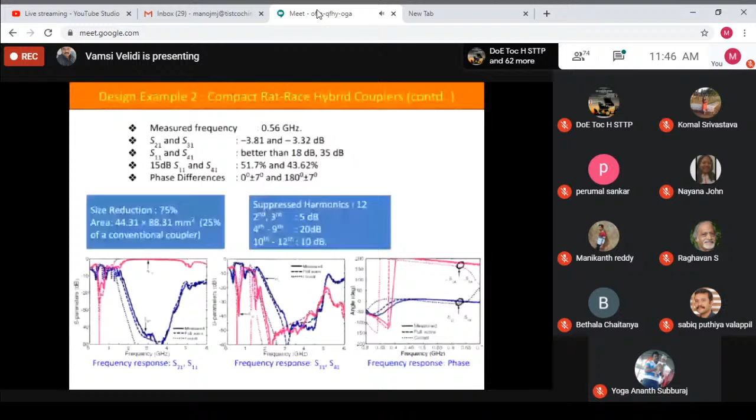So far, as a conclusion: transmission line concepts for filter design, understanding the individual elements and how these can be applied to hybrid couplers or any transmission line based structures, can be realized if we have knowledge of the individual elements and filter configuration. We can make use of this further for any other antenna designs, including antenna arrays.

One thing to note: all these designs are simply based on transmission line concepts, there is no complicated EM analysis involved. I'm not criticizing any other design approach, but this is one area where researchers can directly connect easily to the concept, so they get motivated and encouraged. After that, we can comfortably understand the behavior of other structures as well.

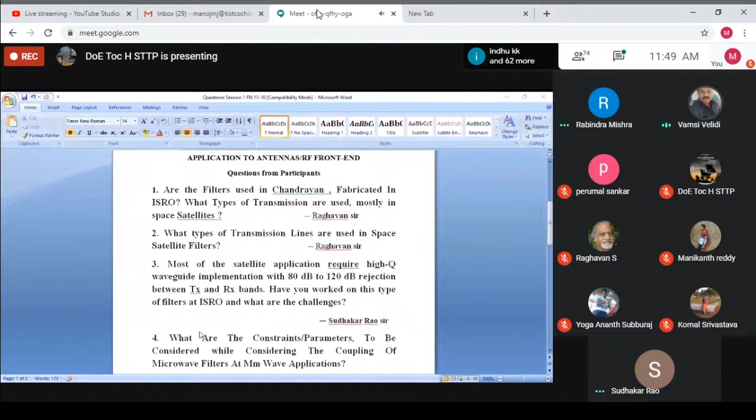I have one suggestion. Regarding the antenna part and filters, there is another method of using that. You might have seen this paper by Professor Itoh, it came in '98 or '99, I don't remember exactly. It's an MWCL paper, in which he feeds the antenna from both ends.

By feeding from both ends, he filters out all the even components, all even harmonics are filtered out, by feeding from both the sides. That is a very good method of filtering out even modes. Odd modes you have to use a filter for, but even modes you can easily filter out that way.

Yes, I'll look into it, sir. I'll definitely download that one. Itoh paper, yes, Professor Itoh.

Okay, sir. Otherwise, it was a very insightful presentation. It showed your understanding, your grip on the topic that you presented. It was very good, thank you. I enjoyed it completely, thank you, sir.

This is my third presentation, sir. Last time I've given it at NIT Rourkela. So getting this opportunity now only. Actually, I have not given so many talks. After joining ISRO, this is the third one. So I welcome any suggestions, sir, so that I can improve further, so that it can be better for readability and interest point of view.

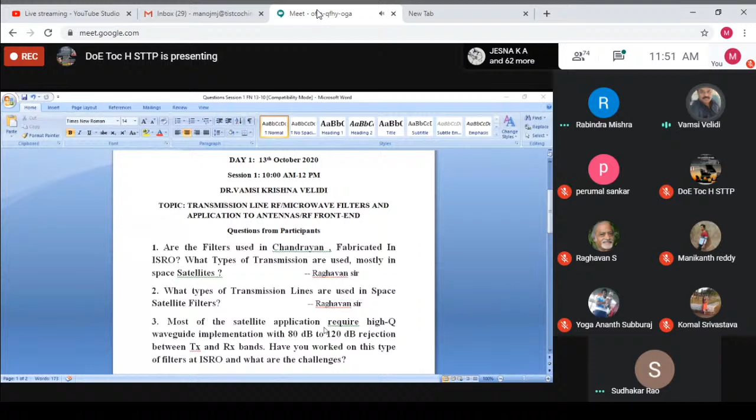Keep giving more talks, that is the only way. Yes, sir, yes, sir. Thank you.

Shall we start with the question, sir? Yeah, go ahead. Vamsi, sir? Yes, madam, can you see the question, sir? Yes, madam, okay, Raghavan sir's question: these filters are used in Chandrayaan, fabricated in ISRO, and what type of transmission lines are used mostly in space applications?

I'll explain one by one, madam. Yes, sir, definitely, these dual mode filters are used in Chandrayaan, sir. Particularly for lander and rover transmitter and receiver purpose only, we have used planar transmission line filters, where size and weight are a great constraint. Also there is no much frequency interference compared to ground-to-satellite communication, on the moon.

So the frequency selection was 2.4 and 2.6 gigahertz. That's why for receivers and transmitters, for pre-selection and image rejection application, particularly in receivers, I have used this dual mode filter, sir, where there is low loss at 2.4 gigahertz. At the same time, it gets rejected at 50 dB rejection level that we achieved. And for low loss purpose, we selected the RT 5880 substrate, whose epsilon is close to 2.2, so that it is a very low loss substrate. So that is one part in the receiver.

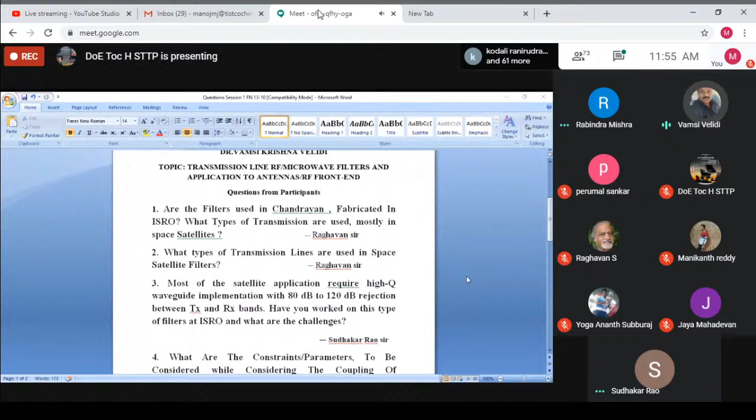Now Sudhakar Rao sir's question: most satellite applications require high Q waveguide implementation with 80 dB, 120 dB rejection. Yes, sir, now for this purpose, iris coupled comb line filters are used, sir. As you mentioned exactly, the requirement for Chandrayaan is 80 dB only, whereas for other IRS applications it is 110 dB rejection, where a hat coupled type of comb line filter is used for miniaturization purpose.

That's all, hat coupling is used for miniaturization. So I got the opportunity to learn waveguide concepts also, because my PhD work was mostly on planar only. After joining ISRO, I enjoyed learning waveguide filters. So I learned these comb line filters with iris coupling for further miniaturization. Exactly these type of filters are used for the transmitter side, where high rejections are required.

So what are the constraint parameters to be considered while considering the coupling of the microwave filters at millimeter wave? Yes.

Now I'm happy to answer this question also because I collaborated with a friend at Global Foundries. We worked on the same topologies since I did an internship at IBM Semiconductor Research Laboratory, earlier called SRDC, now given to Global Foundries. We implemented coupled line filters and stub-based filters at 60 gigahertz using 0.18 micrometer CMOS technology.

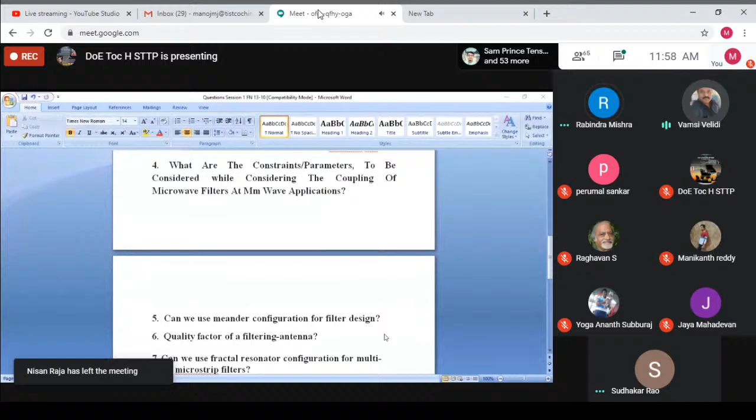Next question: quality factor of a filtering antenna. Oh, this question is new to me — filtering antenna quality factor I haven't seen, sir. It's a good point, I'll try to learn this, because we can see the quality factor of the filter, but after integrating it to the antenna it isn't checked since it's no longer a filter, it becomes a one port device again. But I'll definitely look into this. It's interesting, the overall antenna quality factor I think, but right now I cannot answer this question.

Can we use fractal resonator configuration for multi-band microstrip filters? Yes, multi-band microstrip filters like stepped impedance stubs, or a combination of coupled line and stepped impedance stub, or closed loop resonator filters also exist. A fractal resonator is, in a way, taking a patch-based resonator and cutting it in some fashion, or a wide, longer length line meandering in a fractal pattern. I think conceptually, as a filter concept, it has nothing to do with that directly.